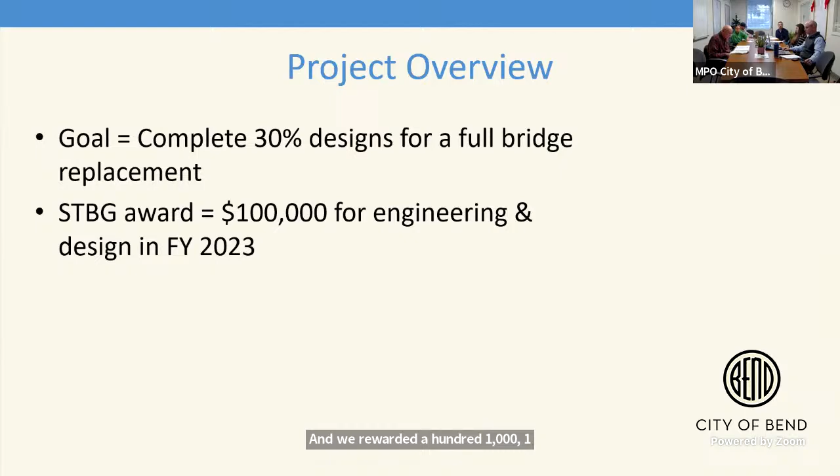Tyler, you can go to the next slide. Just as a reminder to everyone, the goal of this project was to complete 30% designs for a full bridge replacement. We were awarded $100,000 for engineering and design in the last round of STBG. Just to remind you guys, the bridge is a wooden structure.

It connects Columbia Park with Riverfront Street, and the reason we wanted to replace this bridge is that it's an aging structure. Primarily the surface -- there's not enough width for two-way bicycle traffic, and it's kind of a rough wooden structure, not very pleasant to ride over. There's also some concerns with the steepness of the approach, particularly on the east side of the bridge.

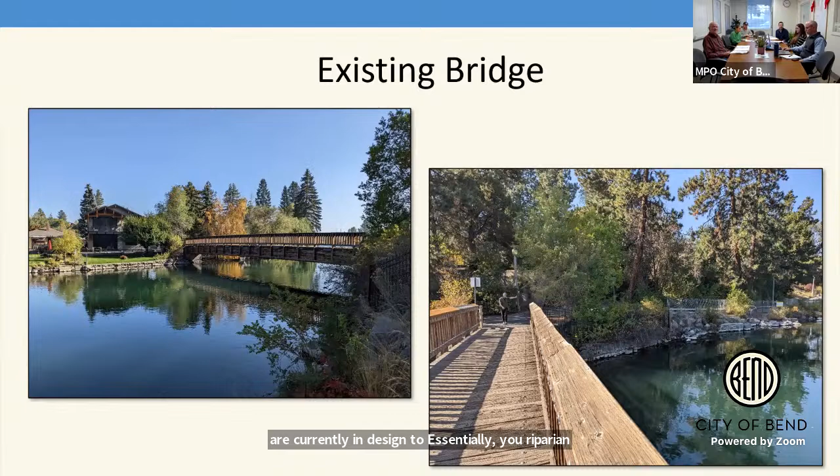One thing I want to point out is that this project is immediately adjacent to another Bend Parks and Rec project. In the photo on the right, it's a little hard to see, but there's a failing riverbank. We're currently in design to do riparian restoration and create an armored, dedicated river access point. There's a historic river access point there that's been closed for the last couple of years due to the failing conditions.

In terms of the progress we've made since we started, we worked with the City of Bend to have an engineering assessment of the bridge undertaken. That was something that they did -- it's actually their infrastructure.

One of the surprising things we found from that assessment was the substructure was actually in much better condition than we had originally anticipated. So we shifted courses a bit, talked to the MPO and the city, and said we think we don't need a full bridge replacement. We can probably just replace the superstructure above the girders and abutments, and then do some maintenance and restoration on the substructure to shore it up for the foreseeable future.

After the engineering assessment was complete, we moved forward with our adjacent project and created a set of preferred alternatives for the different access points being restored as part of this larger project. We completed the preferred alternative for Columbia Park, which incorporates the idea of adaptive reuse of the bridge. It was important for us to know if we had to fully replace those abutments, because that would impact the adjacent project and its design.

The last thing we've done is complete an IGA between the city and Bend Parks and Rec that outlines our roles and responsibilities, since it's city infrastructure and we're doing the design and potentially construction as part of our project. You think these things are easy, but it was a 6 or 8 month process to get that document done.

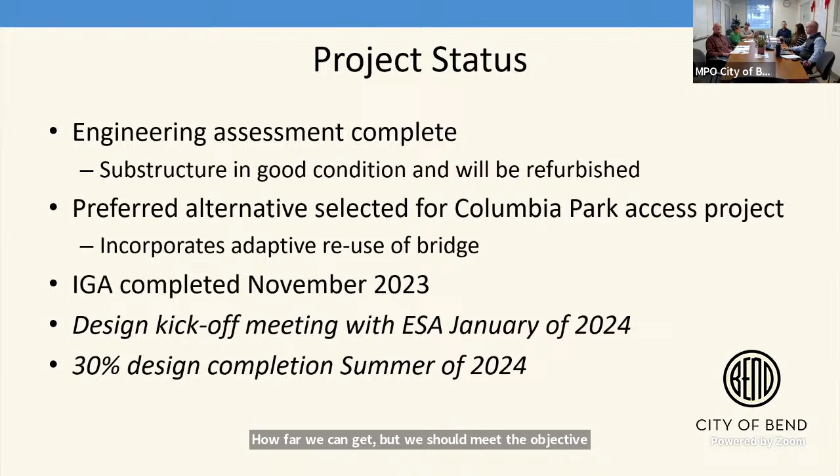I just want to show you guys this — this is the preferred alternative. This is a crummy picture from Google Earth showing the existing conditions. But if you go to the next slide, you can see what's been proposed for the site. I'll go over some of the elements.

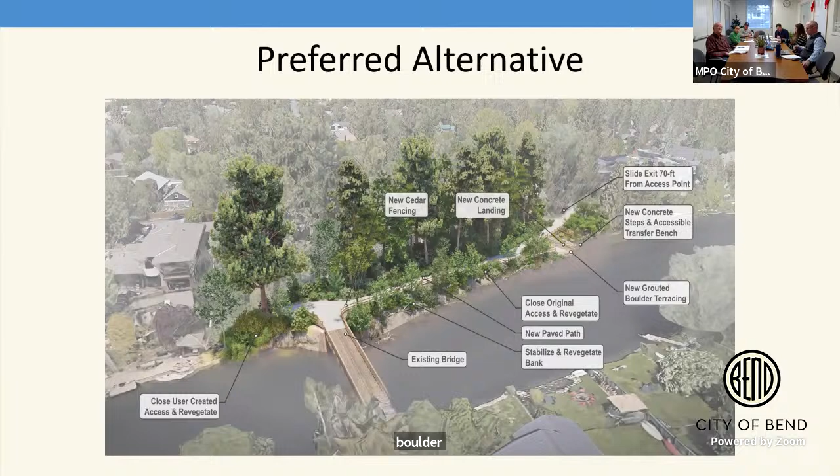You can see the bridge deck — we're hopeful that it's going to be widened and improved. We're making improvements to the trail that runs along the riverbank; currently it's an aggregate trail, and the goal is to pave it, as it's part of the city's greenway system and low stress network. On the far right, there's a new boulder-terraced river access point, and also some riparian restoration that would be done as part of this project.

Andrea also wanted me to give a quick update on a separate project. We were awarded funds in 2020 to do safety enhancements at 3 different crossings of the Central Oregon Historic Canal Trail. We were awarded $64,218 between 2021 and 2022, in 2 separate awards.

We had asked for more money for this project, which was split into 2 phases. The first 2 crossings we focused on were Blakely Road and Brosterhous Road, and there was also an additional crossing at Ferguson Road, part of the original goal. We completed Blakely Road and Brosterhous Road, but we had to abandon the Ferguson Road portion because the city had a sewer pipe project coming along Ferguson Road.

As part of their project, the city agreed to do some limited improvements to the crossing, installing a driveway apron on one side of the road that didn't previously have one. But because of the length of their project and the length of our ability to do this project, we essentially abandoned that portion, and returned just over $18,000 of unused STBG grant funds to the MPO, which were reallocated to other projects years ago.

That's all I got. Alright, is that your last? That's my last. Does anybody have any questions for Henry? Ken, I see your hand up.

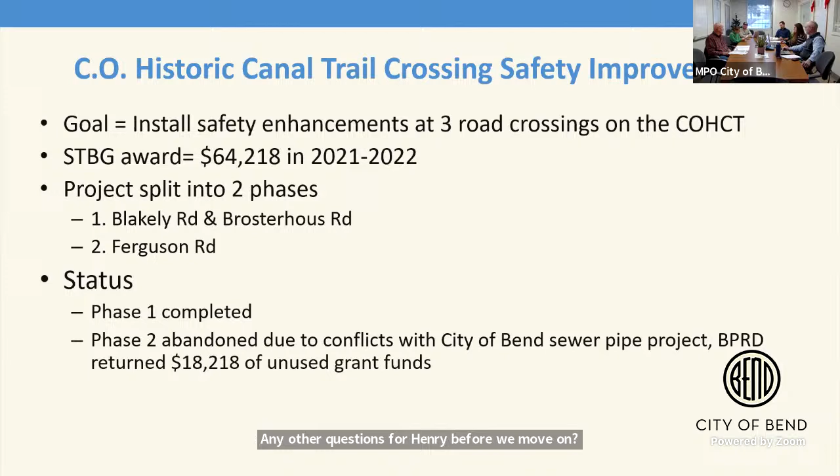All right, next up is, I think, Robin, you're going to be leading or walking through most of these. Is that correct? Yeah, and then both Brad and Kevin - Brad's online and Kevin's in the room with you guys. If there's further questions on their projects, they can go into depth. But yeah, I'm able to report on these. All right.

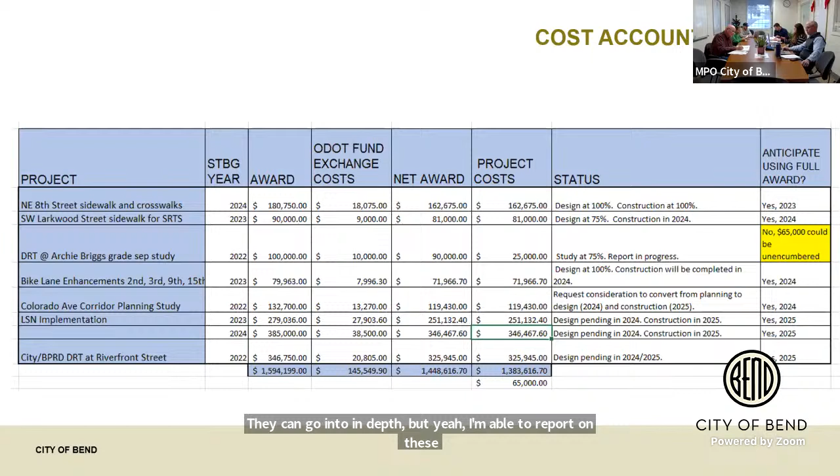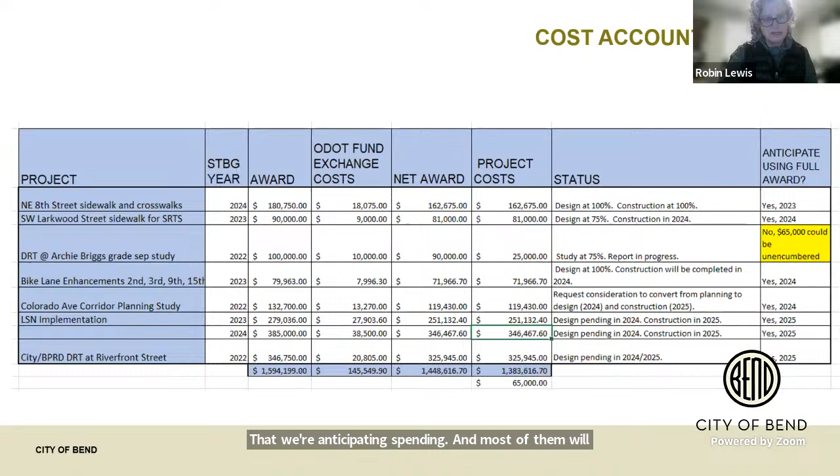So there were quite a few, and I'll go over each in detail. Similar to Ferguson, the DRT Archie Briggs will have $65,000 that can be unencumbered. I'll go over that when I get to that project. But this slide just shows the award and how much we're anticipating spending. Most of them will be able to utilize the complete fund. Next slide.

Next slide, 8th Street. The running theme between all these projects is that the STBG funding allowed us to leverage other projects and utilize project managers who already had an adjacent project, allowing them to expand the scope. For the 8th Street sidewalk, $180,000 - we paired that with some Go Bond projects for the neighborhood street safety program, and we were able to extend sidewalk and two crosswalks. This is a photo of one of the crosswalks. Before, there was nothing out there, kind of a path users had created, really inadequate infrastructure and illumination for crossings.

This route is used to get to a couple of pretty popular parks - one on the west side at Seward and 6th, and then Hollinshead Park, which is more of a regional park - as well as school kids going to Juniper and Pilot Butte Middle School. It was constructed this summer, and we're working on some final closeout elements. This photo doesn't show the signing and markings, but those have been completed and are in place now.

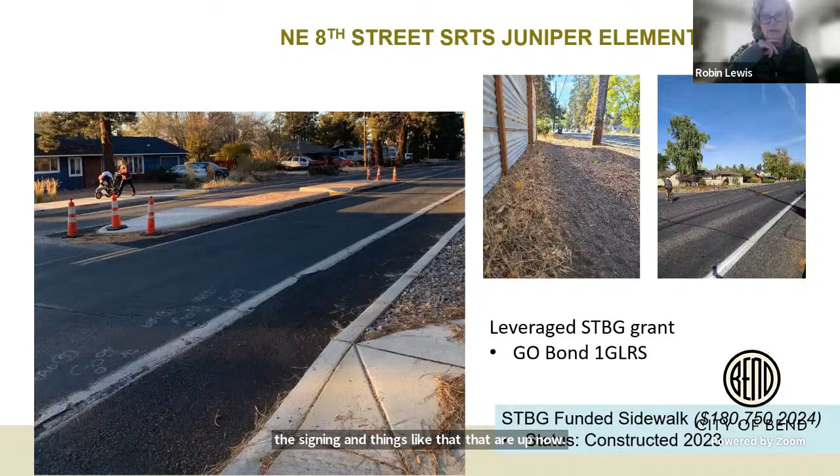Larkwood - that one's in progress. Next slide. $90,000 - again we paired that with the neighborhood street safety program from the Go Bond, and we're in design. We've just completed our 75% design, and that plan is shown. We were able to really feather this in.

It's a retrofit, so there's a lot of existing elements you can see in that embedded photo - a lot of existing trees and really fancy mailboxes. This design worked with the neighbors to save trees they wanted saved, and to go around existing landscaping as much as possible. It will be built in summer, so it'll be usable for the kids this 2024-25 school year. This feeds Ponderosa Elementary School.

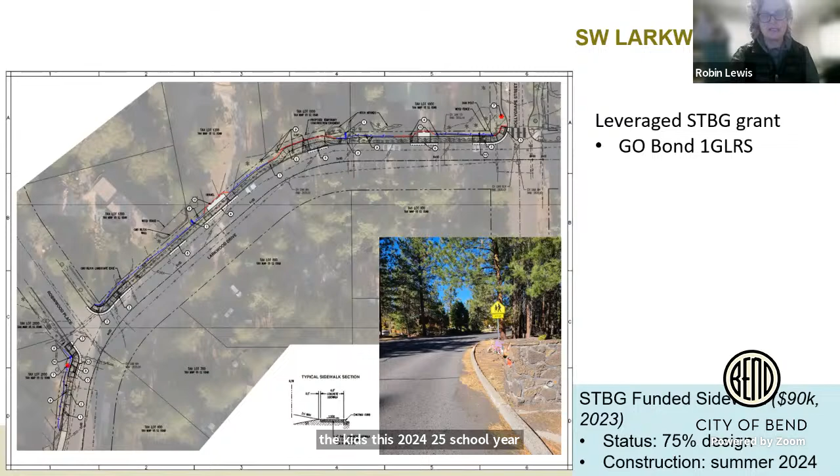DRT. So this was an exciting project. If you go to the next slide. Yeah.

Again, it leveraged a couple of different projects that were going on. So we had some good consultants help work on the project, which was meant to determine: is it feasible to create a grade separated trail crossing? You can see from that profile at the bottom, we think it'll work really well.

They found they're pre-built bridge girders and things like that, you would just have to build up the fill. You can see all those really close contour lines on the edges of the road. So if you could create that, then you could kind of just drop in a bridge. It's not that wide. So it was pretty exciting on that.

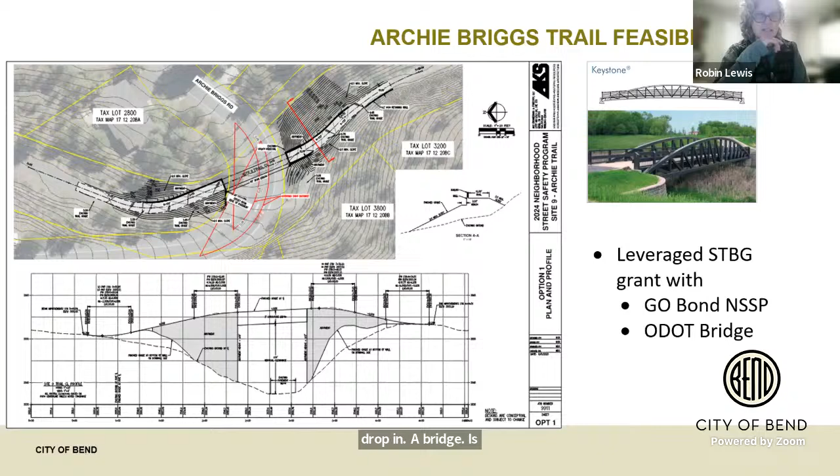Next slide. So we utilized about $8,000, and they were able to come up with, yes, it is feasible. You could use a delivered prefabricated steel truss, IPE wood decking, about 500,000, a little bit less. Mobilization, approach grading is the other half. So we've come up with a really rough cost estimate of about $1 million required for construction.

We don't have the ability to fund that at this time, so we'll be able to utilize this information to look through the city's CIP and other funding opportunities in the future.

So to put a bow on everything, we're anticipating another 16,000 needed for 25,000 out of the 90, which means we can unencumber 65,000 and could reassign that. We'll work with Andrea on that.

Hey, Robin, can I make a comment here? Yeah, so I just wanted to add that I've had some talks with Garrett Saborin at the city and others about this project.

And this is a project that we are very, very supportive of. We think that it would be an incredible addition to the trail system. And we've been kind of waiting to see the results of this feasibility study. I'm anticipating more conversations between the Park District and the city in terms of how can we fundraise for this project, how can we seek grants, and how can we get this thing across the finish line. Because it's something we're very supportive of, and we're very grateful the city undertook this preliminary feasibility analysis. So hopefully more to come on this one.

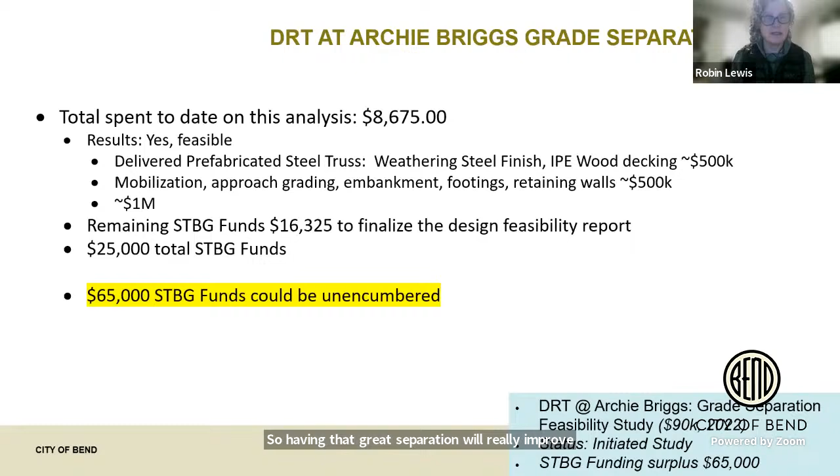Yeah, I agree. I think that once you get that there, there'll be a lot more usability, because right now it's difficult and dangerous. So that's good.

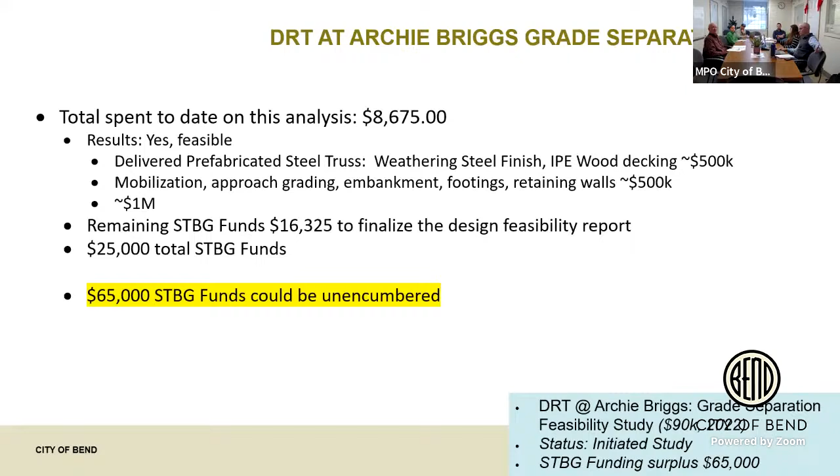Bike lane safety enhancements, 3rd Street. So, 3rd Street—let's see, this one's 2nd Street. So it was on 4 corridors: 2nd, 3rd, 9th, and 15th Street.

And 2nd Street, we've completed design on that. It's a 36-foot wide street today, and we're able to restripe it with 2-foot buffers, 11-foot travel lanes. The bus barn is right there, and some industrial buildings.

So we went out and did some field testing to see how narrow we could make those lanes. And we're actually going to be able to order and install delineators as an expansion of the Wilson corridor, which is right around the corner, utilizing a protected bike lane system. So this will tie that up to the new timber yards master plan development, and tie into a city enhanced crosswalk at 2nd Street and Wilson, which ties into the city's neighborhood greenway design.

If design's complete and we delay construction until next summer, the city will be able to utilize a pavement preservation project—so again, that ability to leverage. The city crews are out there; there's a grind and inlay going on next summer, so we'll be able to come in right after that with this striping plan.

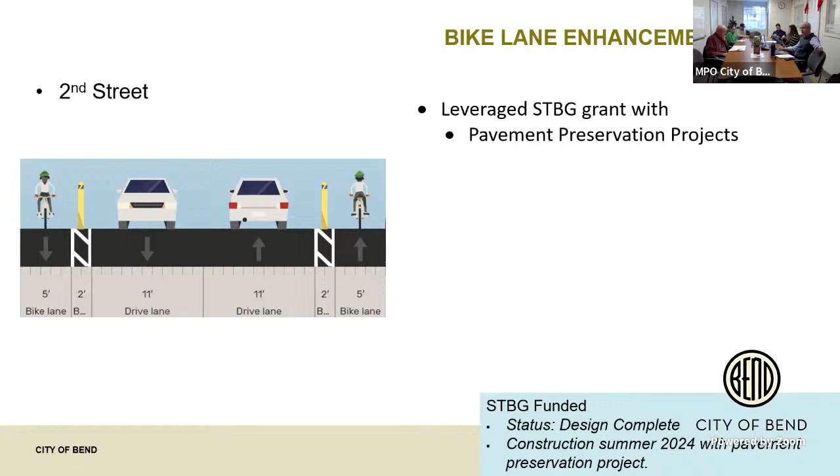3rd Street's completed—so we designed it with the 2nd Street package. We hired a stripe removal crew out of the valley to come in and use a water-based hydroblast to remove the old stripes. You can see where the old stripes were. So we basically just shifted everything over, shrunk the 2-way left turn lane just a little bit, but really shrunk the outside lane and the inside lane quite a bit.

So that's a 5.5-foot bike lane, and there was no bike lane out on 3rd before. This runs between the traffic signal at Wilson, and then back towards the railroad.

So this went from Davis to Wilson, and there was just no bike lane out there before. South of Wilson, there was a bike lane, and north of the rail, there is a bike lane. So there was this missing gap from an old Pave Pres program, this area just didn't get paved and restriped. There was actually an overlay scheduled for next summer, so we were really looking forward to doing this then, but that got delayed, so that's going to be in about 3 years. So we decided to go ahead and finish this one.

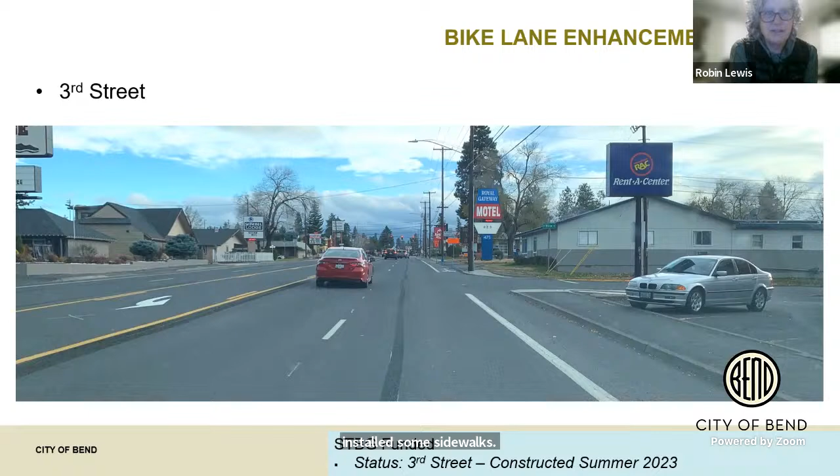And we tied it in with missing sidewalk out there, so the crew restriped this and installed some sidewalk. I don't have a photo of it, but it looks really good out there if you're over by the railroad and Miller Avenue.

9th and 15th, we tied those in with a Pave Pres program, and we were able to do brand new striping and utilize the grant just for additional materials. So that's completed. I am seeing a little bit more ridership, though I don't have counts to prove that, so that's just anecdotal. But it connects towards Bend High. We still have a little bit of gap to get to Bend High, but it ties right into the new Wilson corridor on both ends.

And then on 15th, it goes down to Reed Market Road where we can tie into the Larkspur Trail and the COHCT Trail. So it's a nice connector.

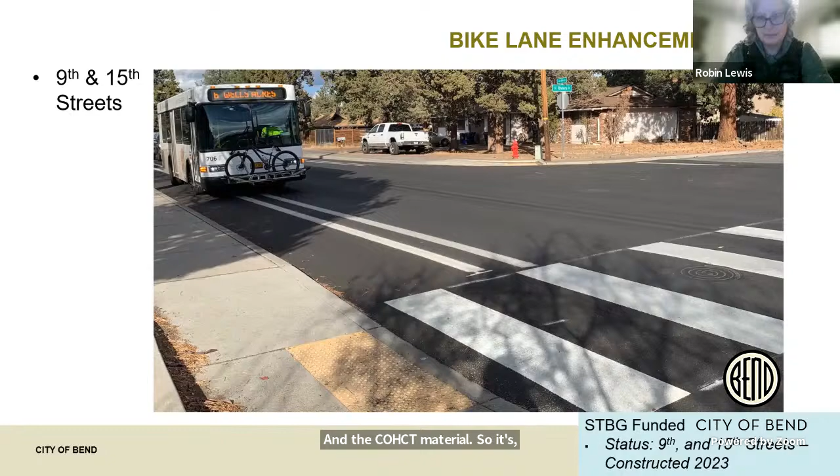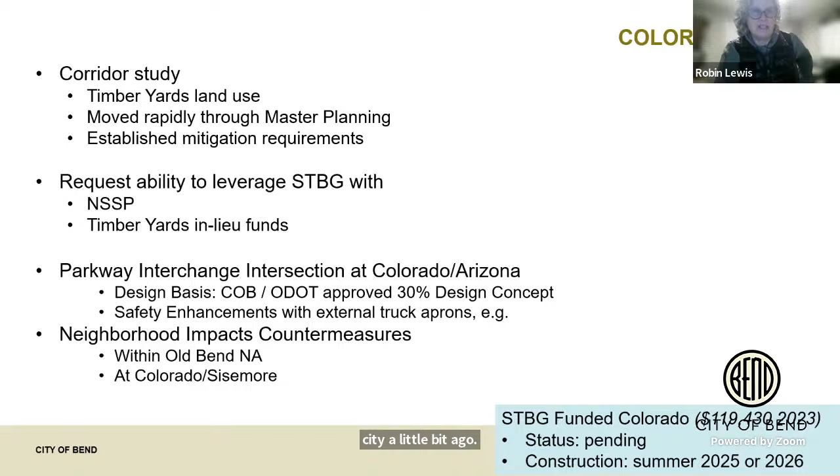One idea: Timber Yards is on the hook for some improvements at the signal and at Sisemore in Colorado, and we're thinking they're going to utilize an in-lieu clause in their master plan to provide funds to the city, which would let us leverage a little bit larger project. We wanted to use the basis of the Colorado-Arizona work. We've already got this 30% design concept, approved with thumbs-up from ODOT and the city a little bit ago, where we were looking at external truck aprons and an improved connection. There's a pathway from the north and a pathway from the south, but no good way through the signal for walk and bike. So it's kind of up in the air still.

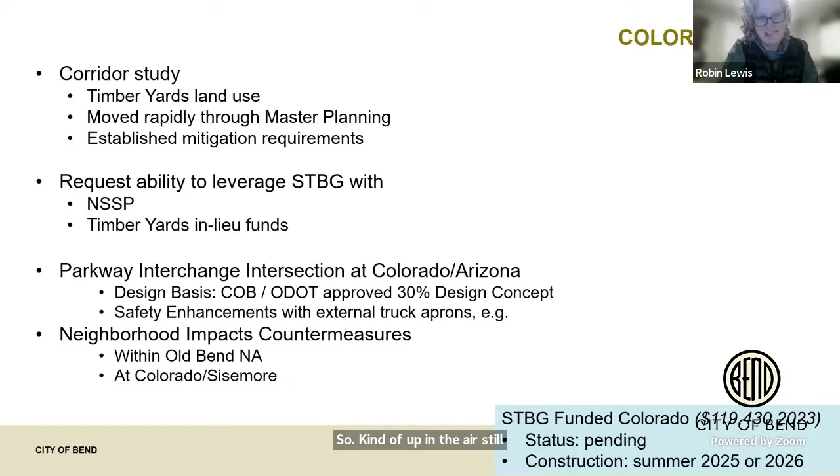They've got the design team on. Design will proceed through 2024, and it's anticipated that construction is in 2025.

Riverfront. So Riverfront, the map.

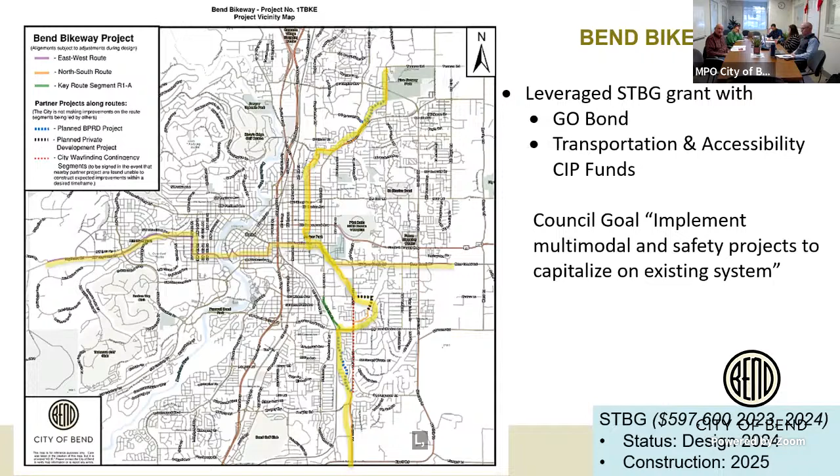There's a plan for a Parks District and city combined facility along Knott Road that would tie in that very south piece. You can see 27th and Knott—it's the very bottom corner of this map.

So there's a shared use path that goes to Caldera High School, highlighted in yellow, at the very south. And then there's a couple of options—we're applying for arts funding for two different small pieces, one near China Hat, one near Brosterhous. And I'm putting together a small piece at Country Club right in the middle, but there's going to be gaps out there for a while. It's just the ability to piecemeal some projects together until we get a larger project out there.

But yes, the goal is to connect it with another path. So then you'd have the path coming from the ODOT network, Baker area. You'd have the path along Knott, and then this path that goes along 15th, connects through Nottingham, and then ties into both the COHCT trail east-west and the Larkspur north-south. So path to path to path.

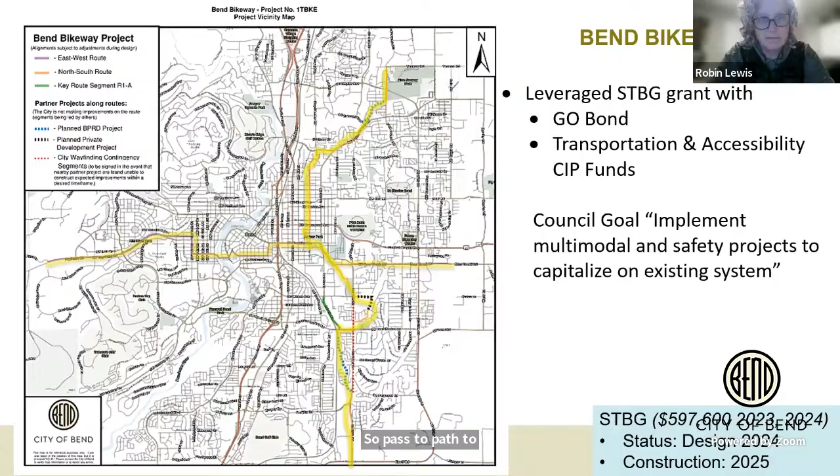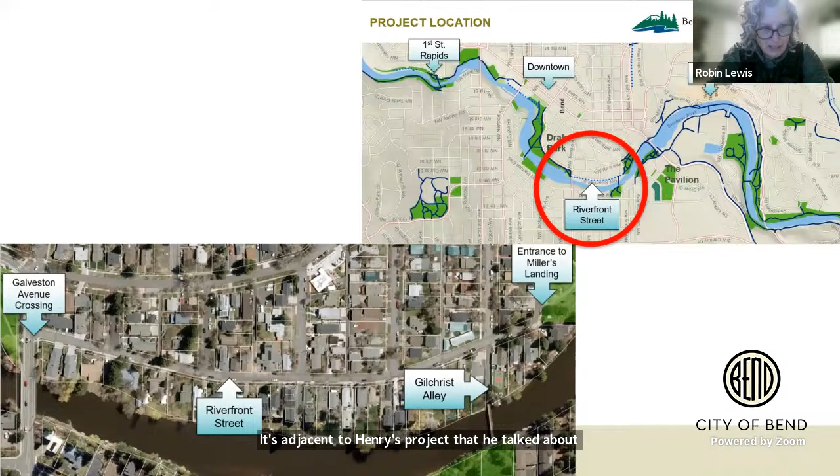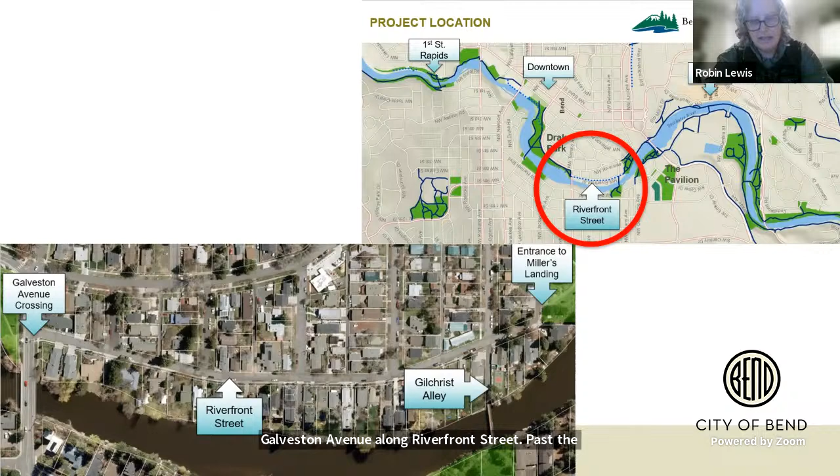Riverfront. So this is the small section circled in red on the Deschutes River Trail. It's adjacent to Henry's project with the Gilchrist Bridge. The photo shows the limits of the project. It goes from Galveston Avenue along Riverfront Street, past the Gilchrist Footbridge Alley, and then ties into Miller's Landing.

Next slide. Again, we were able to leverage funding, really healthy funding from BPRD, and this grant to move into a design. So we have the design scope of work. We're working to create a signed contract, and we were able to process an IGA with Parks and the city to create this partnership. We're anticipating that design is completed in 2025.

Robin, with this project, I know there were some funding issues to move into the design. There were insufficient funds to move through the full design process. Have those been resolved? I can chime in, or Brad can chime in, because Brad and I have been the points working on this. So we think they're mostly resolved at this point.

As part of our IGA with the city, we've agreed to match dollar for dollar every dollar the city spends on the design. Our original order of magnitude estimates were around $500,000, and the contract price they're currently negotiating is a little bit higher, at $683,000. So we're still looking into the exact language of the IGA to make sure we don't have to make any changes. But we've committed to fund dollar for dollar up to that. I think we're pretty comfortable matching the STBG grant award amount, which would give us essentially the 100% contract price plus a little wiggle room. We're just going through the background mechanics to make sure we don't need to change that IGA, but at this point I think we don't, and we should be pretty solid for the designs.

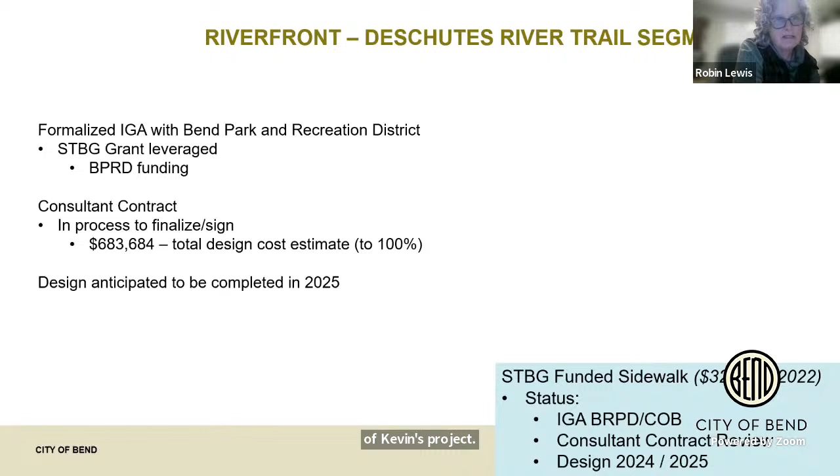So Andrea, the one question I have on the second year of Kevin's project - I know we've gone through the fund exchange for year one, but I don't have any record that we've gone through the fund exchange process with ODOT for year two. And is year 2, is that 2024? Yeah. Okay, let me follow up on that.

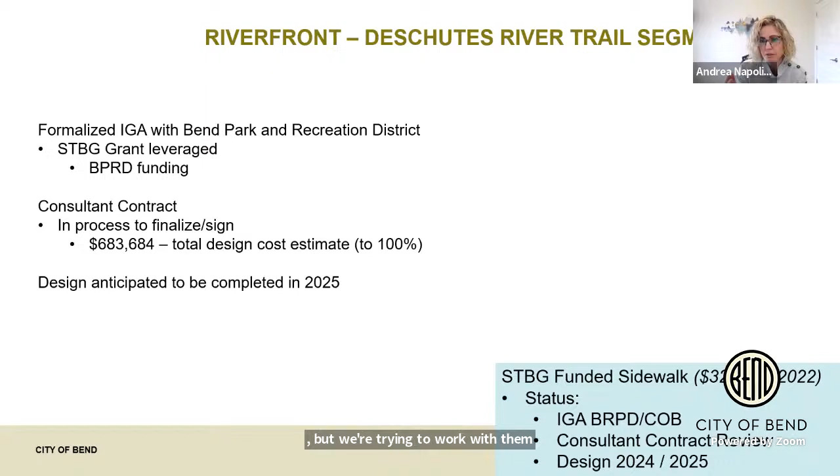We are right now in the middle of working with ODOT on some of the future funding estimates that we had received previously. They came in a little lower. I think it will be fine, but we're trying to work with them. So after 2024, we had been holding off having those funds go out. But let me double check on that, and then I'll follow up with you. Thanks. Yep.

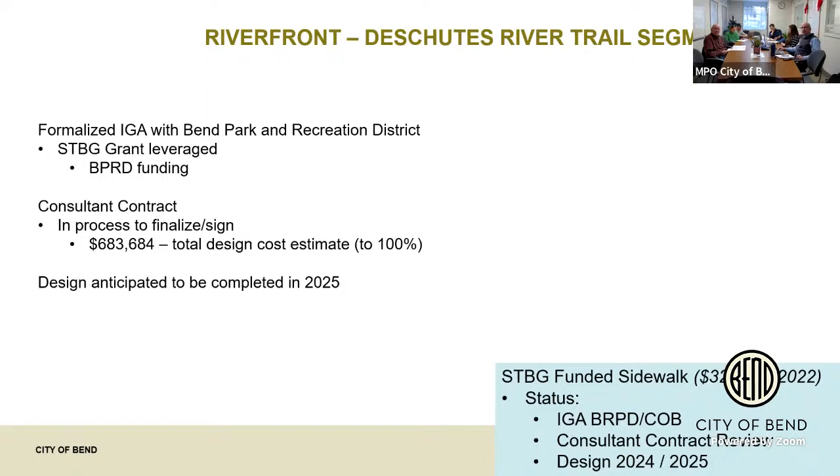Yeah, so this was a Bend-La Pine School District project, safe routes to school. I'm here so I can address it. Okay, great, Sharon. So, don't mean to steal your thunder. No, go for it. I apologize for being late.

At this point, we have two alternative paths: one which will kind of snake up the west side, and the other which wraps around the east side. Hopefully I'll have those maps and surveys to share at the next meeting or even in between. Then we will evaluate which we think is most suitable for community needs and which is most economically feasible, and work with Robin in the city, because the next phase is construction, which my understanding, Robin, correct me if I'm wrong, is part of the GO bond. So that's where we are. I'm hoping to have the final design concepts soon.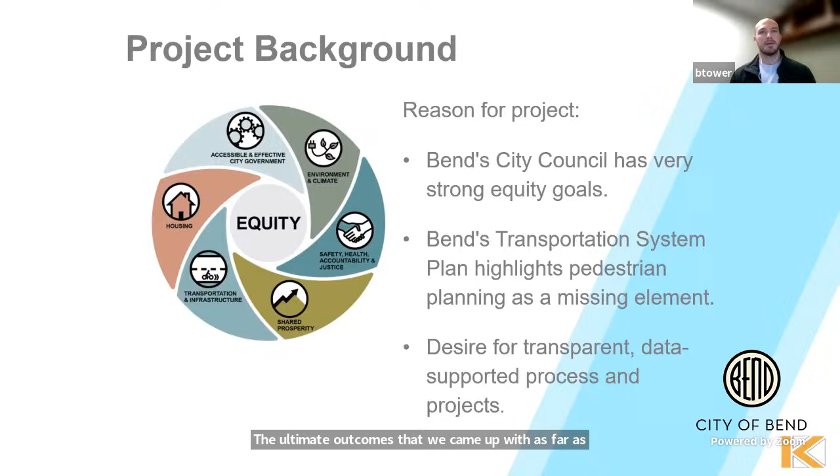So this is the data analysis approach I was alluding to. We leveraged GIS, which is a mapping tool, so you can visually represent and compress a bunch of different data sets into a visual map representation of whatever your interest is in.

I'll go into this in more detail in the subsequent slides, but there are three main data sets that we used to compile and create various maps to determine where the priority is around the city for pedestrian infrastructure: a preliminary base data set, the transportation analysis zones, and the transportation disadvantaged population index.

This exhibit depicts a bunch of different data from the city, the county, statewide data, and other entities like Cascade East Transit. As we were compiling that data, we identified what data is useful. Some data sets are a little outdated and not kept up to date, so we wanted to make sure not to just blindly take the data sets, but sift through them to make sure they were quality data.

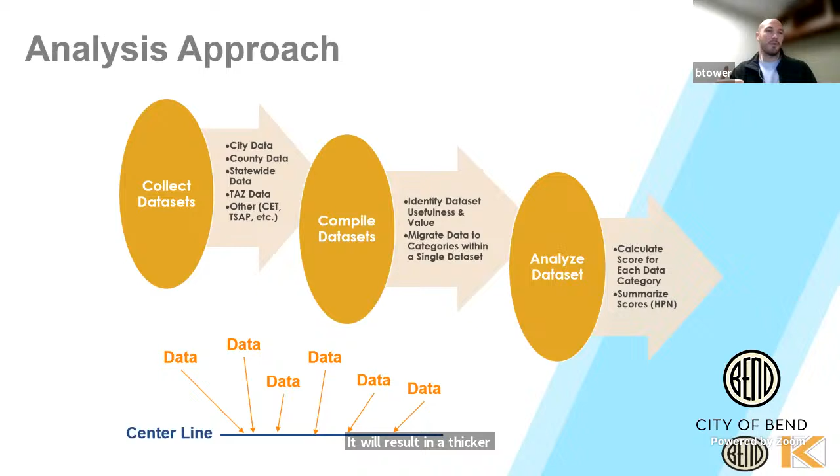This is the first of the three major data sets, the preliminary base. I'll quickly go through the data that is part of that, and you can see the visual output. A dark line signifies very high priority, whereas a lighter or more faint line is a lower priority for pedestrian infrastructure. The data that went into this was existing sidewalk inventory - whether it's completely absent or just on one side of the road - safe routes to school, whether these street segments were part of a route to the various schools around town, and transit routes was a factor.

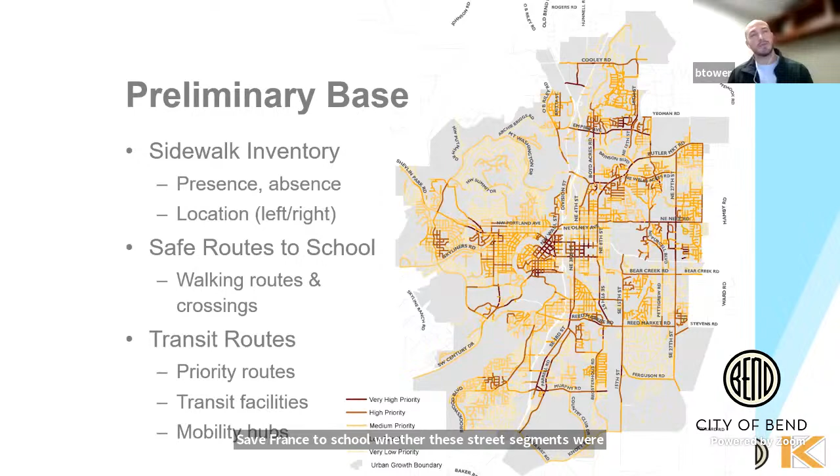Continuing with the preliminary base data, we also looked at park walk sheds, safety - is there existing data of crashes that have existed in the past - and transportation system plan key routes, which is what the city developed as high priority areas or routes for pedestrians and cyclists. So that's data set 1.

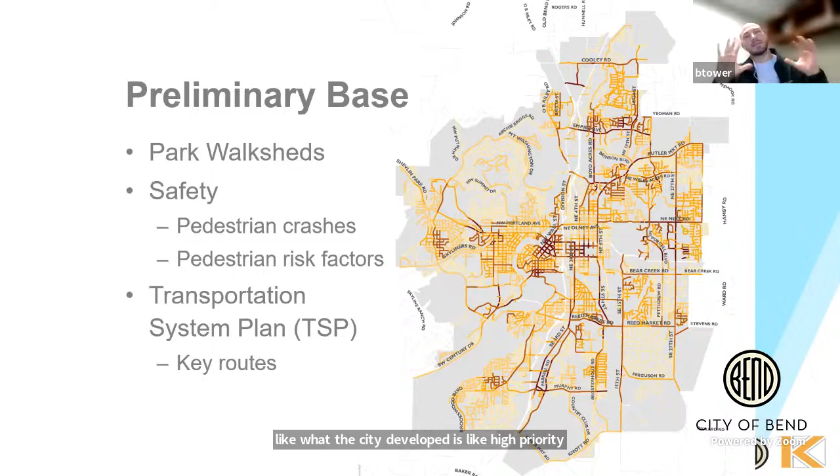This is where the equity lens comes in. There's a big equity emphasis on not only where sidewalk is missing in town, but can we help prioritize where around town that is with an additional equity lens. So the Transportation Disadvantaged Population Index data set includes elderly populations 65 and older, youth populations under 18, non-white and Hispanic populations, limited English proficiency population, low-income populations, households without access to a vehicle, people with a disability, and crowded households.

Just as a mental sanity check here, I think most folks familiar with the city of Bend will notice this has a bit of a skew to the east part of town as well as the north part of town.

I think if you're familiar with the area, that's a good mental sanity check. I think that's pretty accurate.

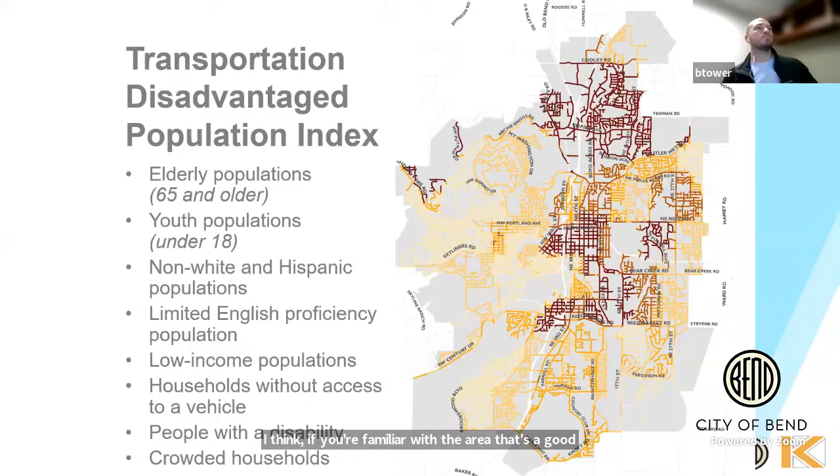So this is the last major data set, which is housing, employment, and population. The data sets referred to as the Transportation Analysis Zone. These are pedestrian destinations of interest. We incorporated into our model municipal buildings, libraries, parks, schools, stadiums, viewpoints, shopping centers, post offices. The intent of this is, if you're looking at the need for pedestrian infrastructure, people are going somewhere, so you need destinations of interest that are within reach by walking. So this is the third major data set.

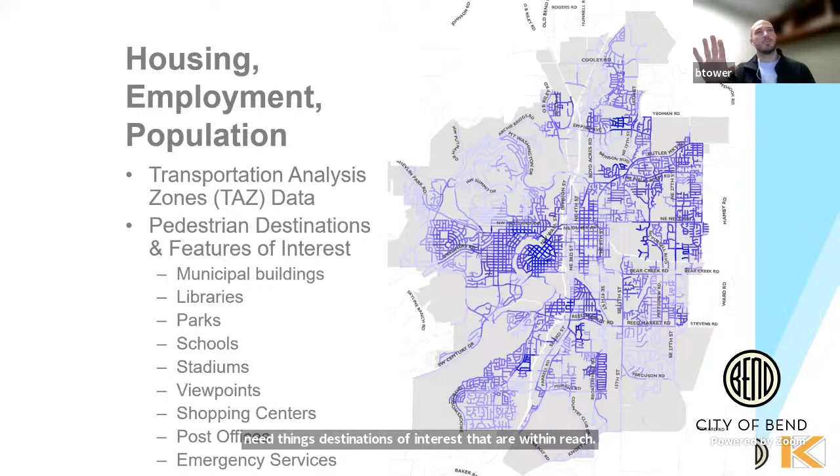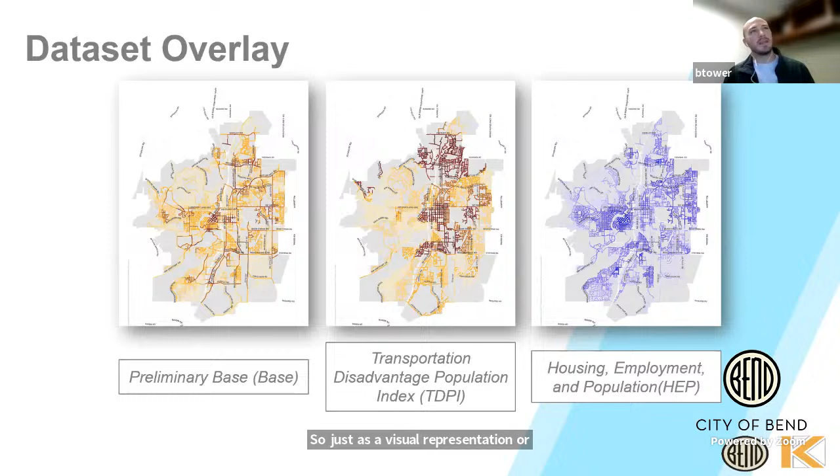Next slide, please. So just as a visual representation, a reminder, these are the three data sets that we had compiled. Now we took all three of those and overlaid them one on another. Again, this is all just using the GIS mapping tool, so that we came up with one overarching map to identify, okay, where are some of these priority areas around town?

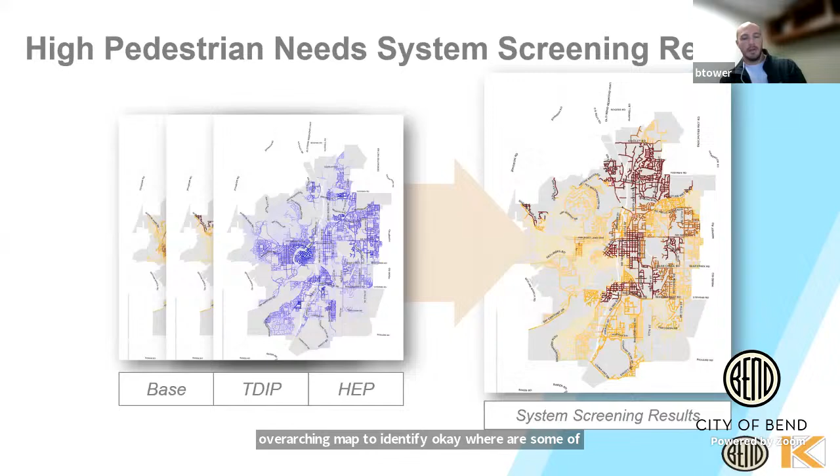So then when we had this map, which incorporated all those different data sets, we could start seeing a bit of a theme in terms of where the highest priorities are around town. We then took an additional step after that and tried to isolate clusters of areas around town where there's a theme of high pedestrian need.

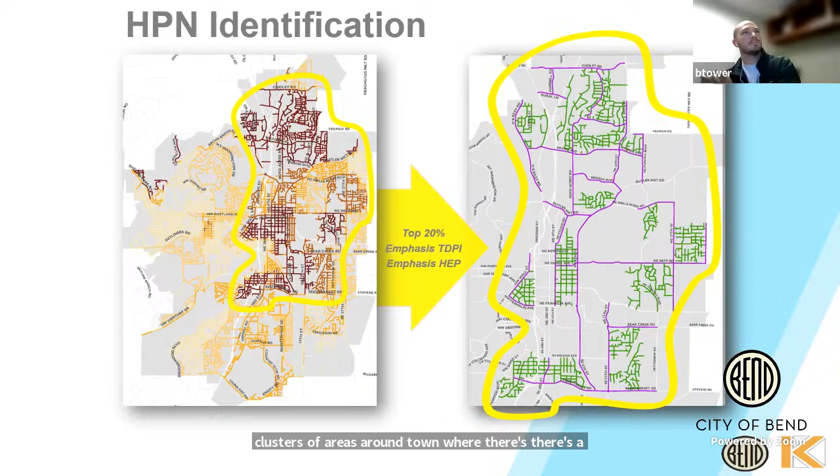Now, before diving even further into the details, I just want to emphasize that even though this was a data-driven approach, we did not do away with the human element. There were multiple workshops where we had representatives from different city departments, as well as outside the city. We had a workshop here in our transportation mobility department conference room where we got a large group, I think about 15 of us, together. We basically critiqued the data, looked at what the output was, and went through our own mental sanity checks to ask, does the data make sense? Because I think just blindly trusting a model is not good practice. So I just want to emphasize that was a step involved in the process, taking a close look at what the data outputs were.

Okay, so after the team members did the sanity check, we then identified what we called areas of high pedestrian need, and we had 10 clusters identified. Maybe I should have mentioned this earlier, but there are two overarching elements of this project. There's the equity lens, where we compressed all this data to try to identify where in town the highest needs are for pedestrian infrastructure.

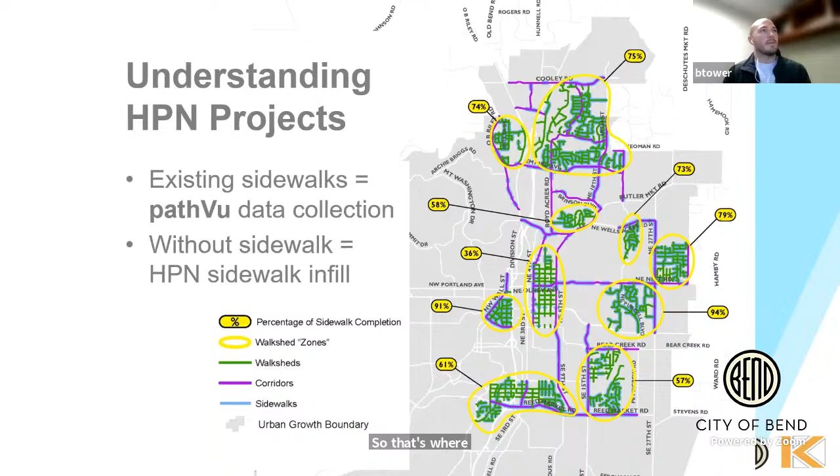pathVu is basically a baby stroller, and they walk it all around. So all those areas identified in the previous slide, individuals with pathVu, depicted here, walked along all the pedestrian infrastructure in those areas. With that tool, they collected things like path type, obstructions, surface type, roughness, sidewalk or path width, running slope, cross slope, level change.

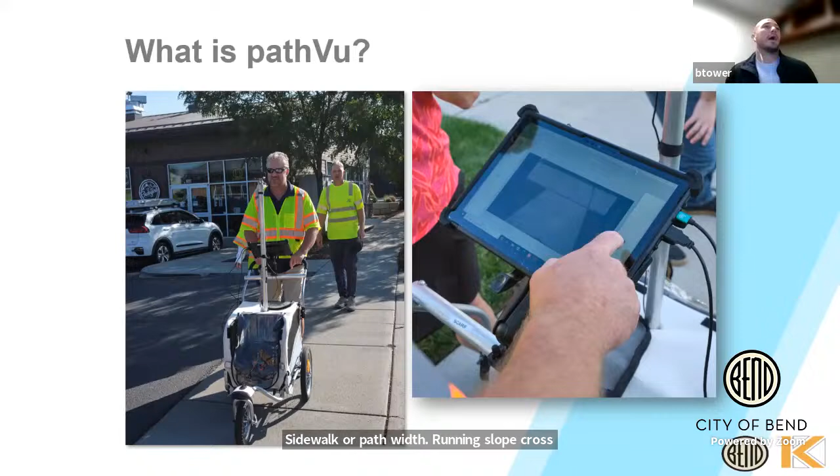And we got an output that looks similar to this. So this is just one particular zone that we looked at, but we have an entire map that highlights, on a score of basically 0 to 100, the quality of that sidewalk. Basically, is it a compliant sidewalk, or is there need for improvement?

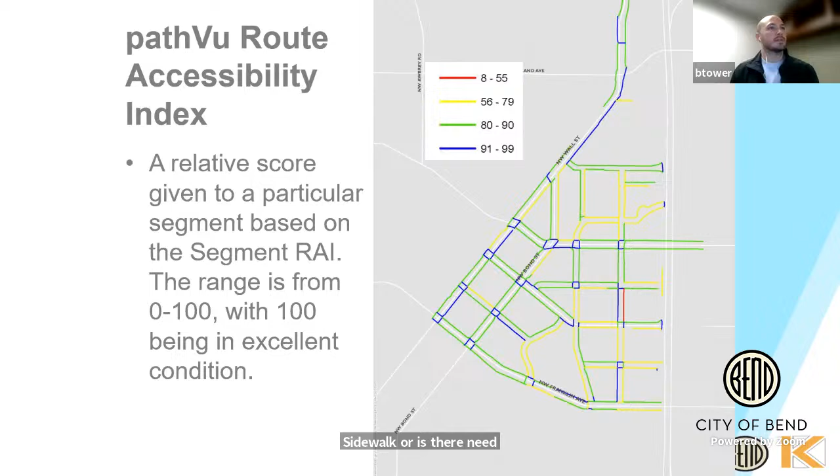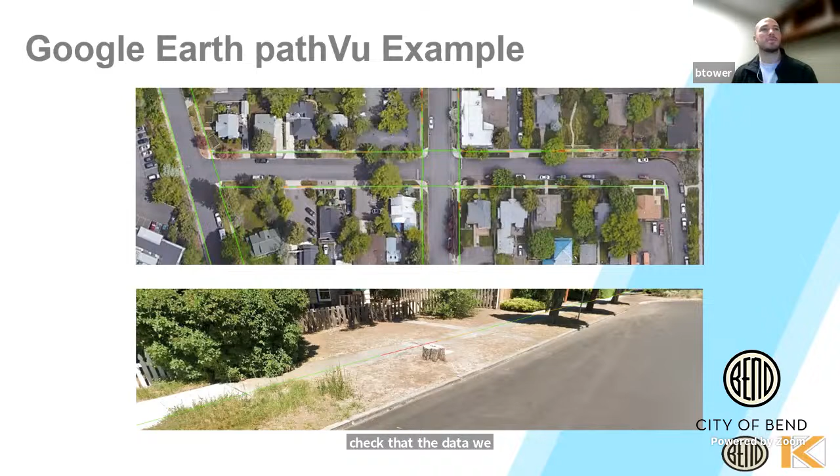It might be a little hard to see in the presentation, but in the bottom picture you'll see a green line that transitions to red, yellow, and then back to green. If you look at the sidewalk underneath it, that's a pretty accurate representation: moving left to right, you have a smooth set of sidewalk that suddenly gets very broken up, and then further up to the right, it looks like better quality sidewalk. So again, that additional human element to double-check that the data we collected was representative of what's actually out there in the field.

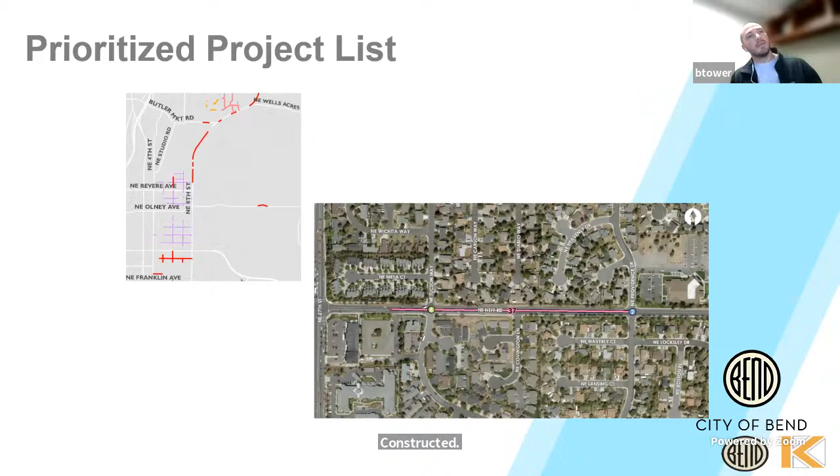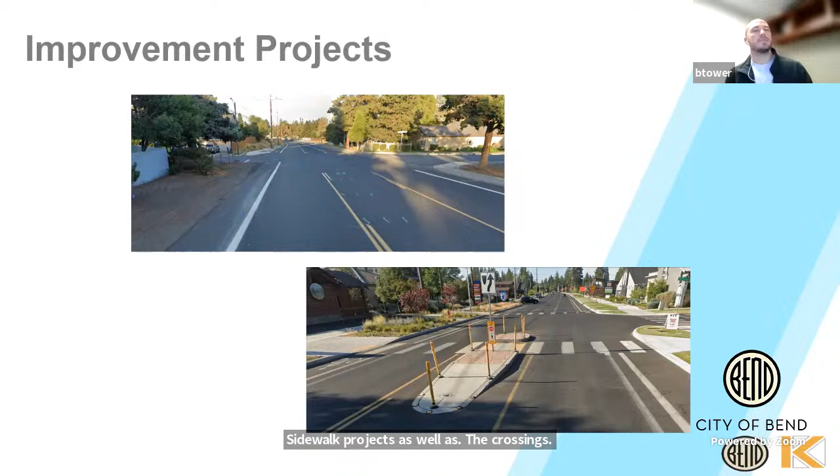Just to sum everything up: once we identified the areas of highest importance, we narrowed that down further to identify some specific projects. We now have a list of prioritized projects - we call it our prospectus sheet. I think there are about a dozen sidewalk projects, as well as crossings, pre-identified for easy reference. Next slide, please.

So, next steps. There are a few things here. Now that we have the data and that tool created, we have what we call this living map tool, so we can continue to update this as we implement projects around town. The areas where we collected sidewalk data, whether deficient or good quality, as new projects address those deficiencies, we can update that data set to better represent our existing inventory of sidewalk.

The other part of the living map tool is that this first effort had an emphasis on equity, but we still have all that data compressed with all the various weights of the individual data that went into it. So if there were some future consideration to focus more on safe routes to school or something of that nature, we could tweak the model a bit to skew away from an emphasis on equity and toward an emphasis in some other area.

Additionally, this creates synergy opportunities for city projects. A lot of times we'll have funding for a project like a capital improvement project, and there's often opportunities where that project is just adjacent to another project we've already identified here, or it may even be part of the CIP project. One good mental sanity check we had was there were quite a few projects identified for sidewalk improvements that are actually already being captured with other city projects.

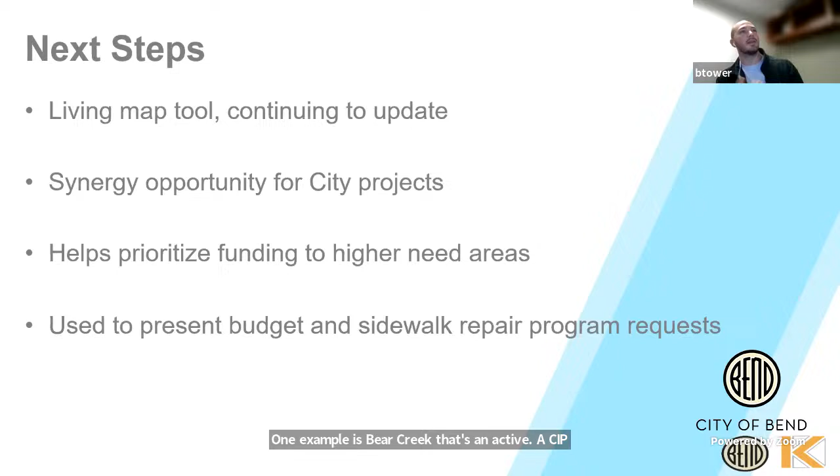One example is Bear Creek. That's an active CIP project right now, so they'll actually address one of the projects we highlighted with this pedestrian implementation plan.

Going forward, it also helps prioritize funding to other higher need areas. So if we have funding to spend on public or pedestrian infrastructure, where do you spend that money? Well, we already have a list of projects ready to go, already identified, and the justification for that. So we can better spend whatever type of funding becomes available.

Additionally, we can use this when requesting funding as further justification when we're looking for additional funding for future potential projects. So with that, I think that's all I had here, just a high level overview of what we did and the results, but I'm happy to answer any questions anybody may have.

Anybody in the room have questions, or anybody online have questions for Brad?

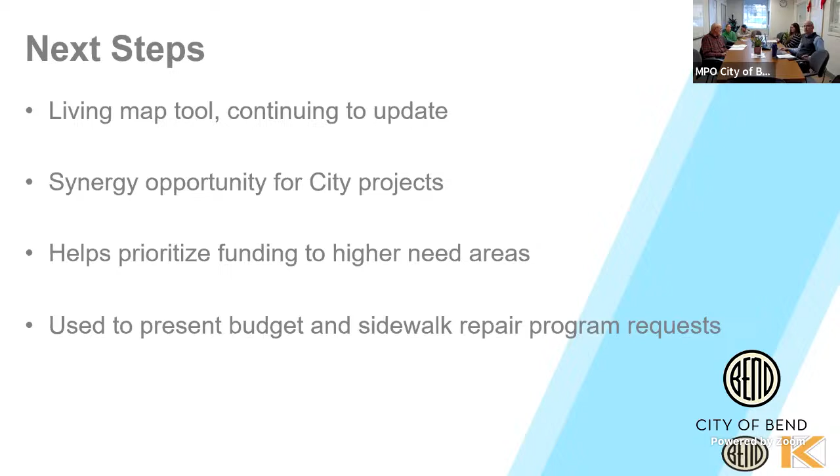All right, thank you Brad. That was excellent. Yeah, no problem.